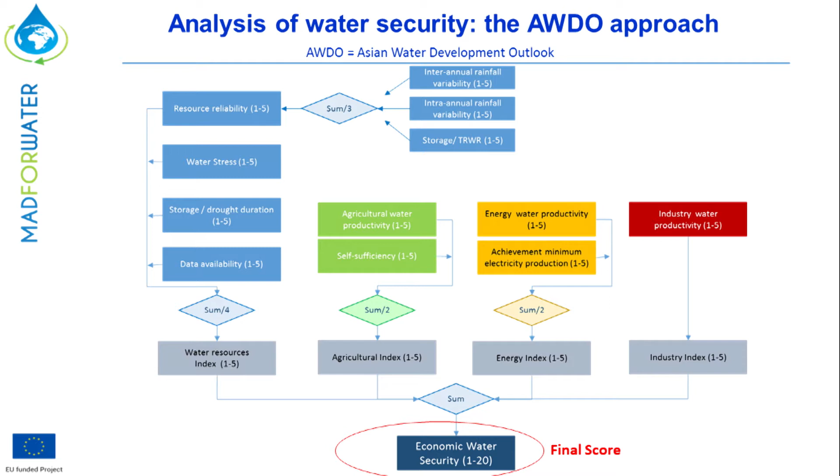We focused in particular on economic water security, which according to this approach is evaluated on a scale from 1 to 20, which is the result of the sum of 4 indices. The first 3 indices are the agriculture index, the energy index, and the industry index, which depend on water productivity and self-sufficiency of each sector.

The last one, the 4th index, is the water resource index, which takes into account several factors, such as rainfall, storage capacity, the level of water stress, drought duration, and the availability of reliable data.

So this approach allows us the identification of the sector in which effort should be directed in order to maximize the overall level of water security in a given country. So this is very important.

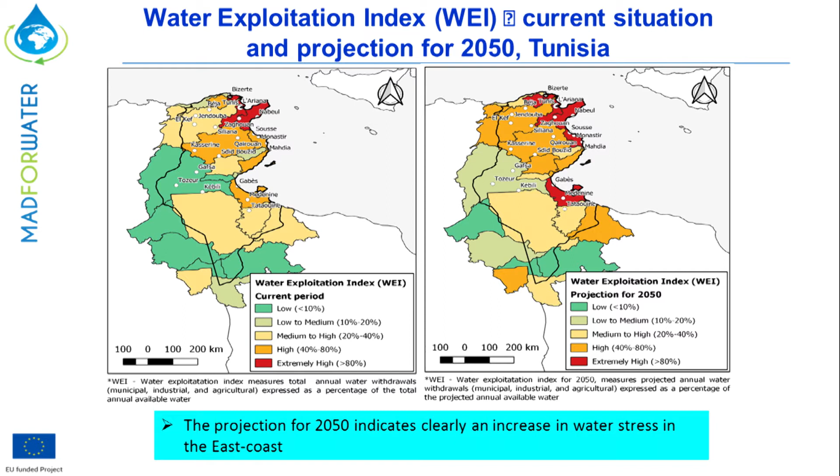So I'll give you the water exploitation index situation in Tunisia, and the study shows that by the projection of 2050, it indicates clearly an increase in water stress in the east coast in the northern part. So this will allow us to see where the wastewater could be reused and have a potential for reuse.

The second phase of the project was to develop what we call the technological phase. We started with the lab scale development of technology of wastewater treatment and efficient wastewater reuse in agriculture in terms of irrigation systems, for Tunisia, Egypt, and Morocco.

So then, after developing at the lab, we tried to scale up and validate the selected technology in the 4 pilots of integrated wastewater treatment and wastewater reuse for irrigation that will be installed in these countries, which are Tunisia, Egypt, and Morocco. So I'll show some of the technology that has been selected for municipal wastewater.

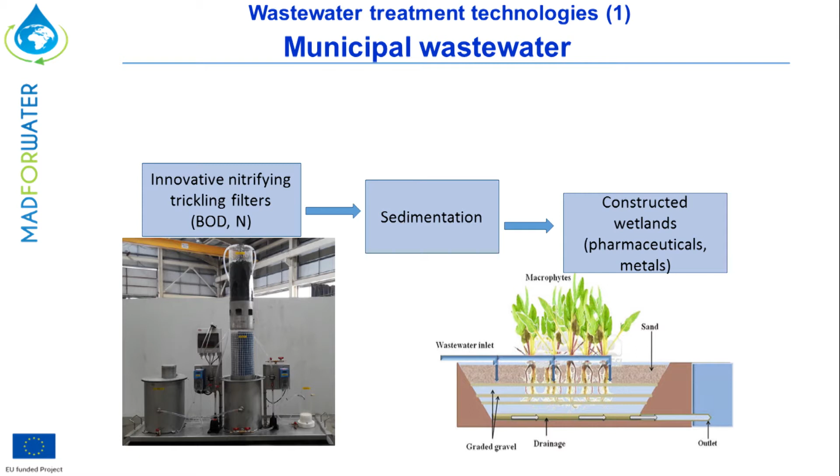This is for Tunisia. We use an innovative nitrifying trickling filter system, followed by sedimentation, then a constructed wetland in order to eliminate some pharmaceuticals and metals that we detected in the raw wastewater.

The second municipal wastewater was in the region of Agadir, where we're using first an anaerobic lagoon to reduce the BOD and nitrogen, followed by sand filtration, then a tertiary treatment using UV in order to eliminate the bacteria to be used for irrigation.

And for textile wastewater, we use a moving bed biological reactor to reduce BOD, nitrogen, and dye, then coagulation sedimentation to reduce the dyes, and adsorption on an innovative resin to eliminate the dye that comes from the textile industry.

And for fruit packaging wastewater, we know that one of the major problems in treating wastewater from fruit packaging is the fungicides that are used for treating the fruits before export. So we started with flotation flocculation to reduce the fungicide and suspended solids, followed by an aerobic moving bed biological reactor, then adsorption on activated carbon to eliminate the fungicide.

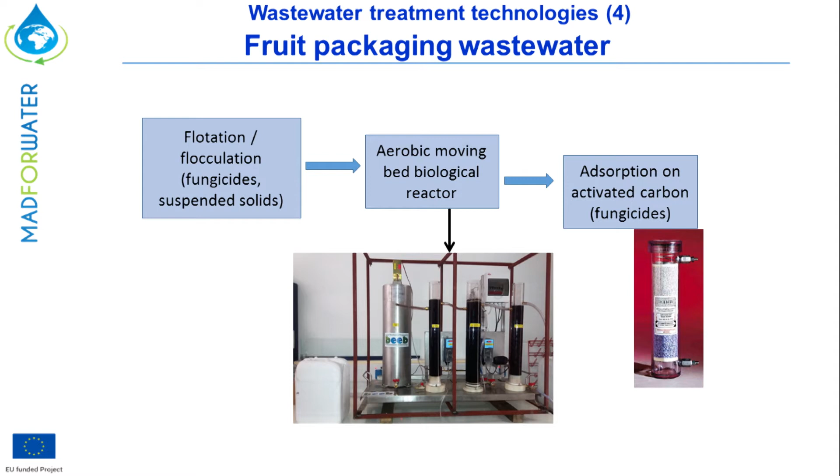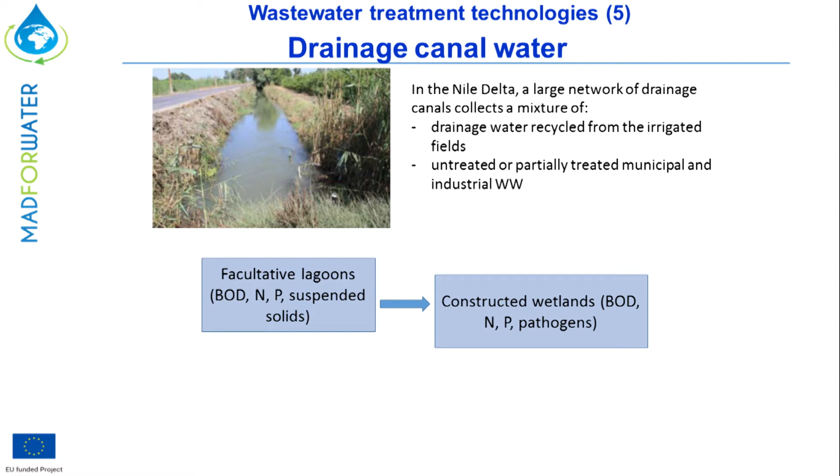In the drainage canal water in Egypt, as you know, most of the large network of drainage canals collect a mixture of drainage water recycled from the irrigation fields and untreated or sometimes partially treated municipal and industrial wastewater mixed together. Here we use facultative lagoons to reduce the BOD, phosphorus, and suspended solids, followed by a constructed wetland to eliminate the BOD, nitrogen, and pathogens.

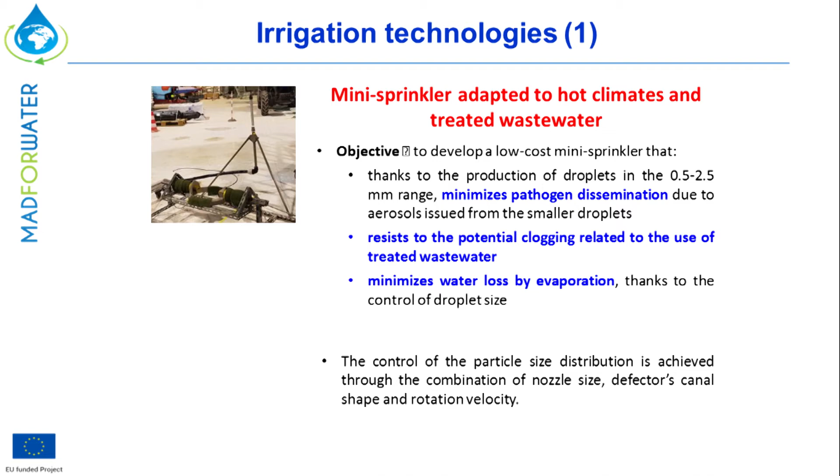In terms of irrigation technology, the project developed mini sprinklers adapted to hot climate and treated wastewater. The objective is to develop low-cost mini sprinklers to minimize pathogen dissemination, and also to resist the potential clogging related to the use of treated wastewater and minimize water loss by evaporation.

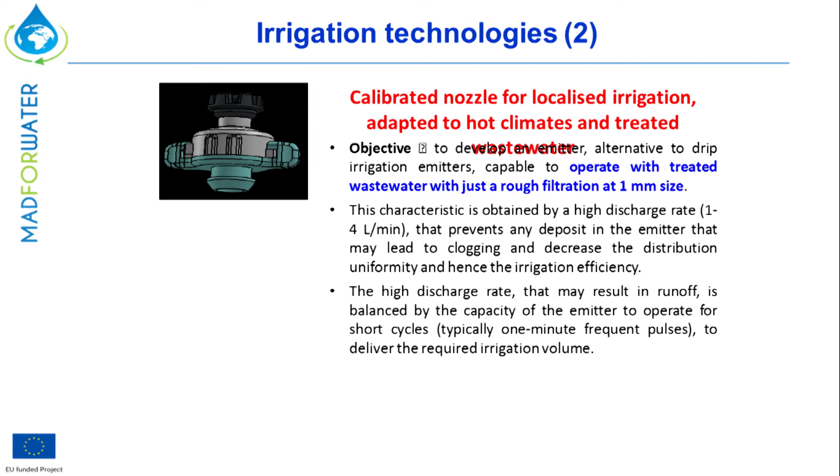Another technology that was developed by Redouane industry in France is the calibrated nozzle for localized irrigation adapted to hot climate and treated wastewater. The objective is to develop an alternative technology to drip irrigation emitters capable of operating with treated wastewater with just a rough filtration of 1 millimeter size. So that means we're trying to prevent clogging using this type of technology.

This is characterized by a high discharge, and I think it's a mistake here. It's between 10 to 40 liters a minute, which prevents any deposit in the emitter that may lead to clogging. But when we use it for irrigation, it's a low operation. We use a short cycle irrigation time to deliver the irrigation volume we want for the plant.

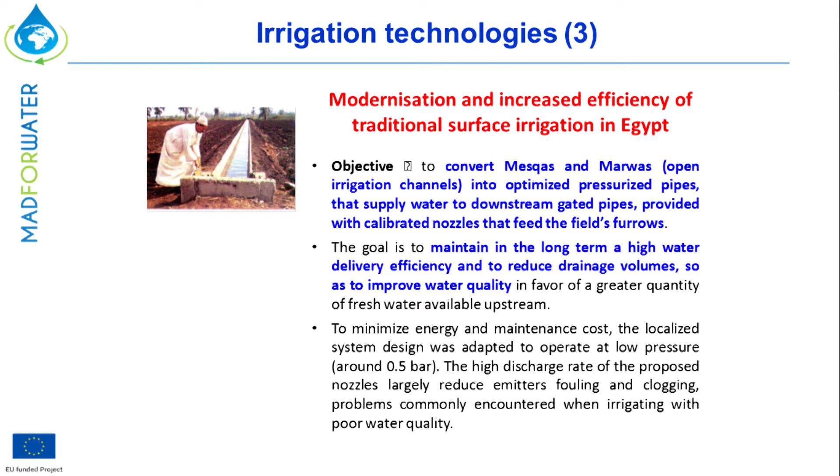Also, for Egypt, we worked on modernization and increased efficiency of traditional surface irrigation. The objective is to convert the open irrigation channels, called here Mesqas and Marwas, into optimized pressurized pipes that supply water to downstream gated pipes provided with calibrated nozzles that feed the field's furrows. The goal is to maintain a long-term and high water delivery efficiency and reduce drainage volume so as to improve water quality.

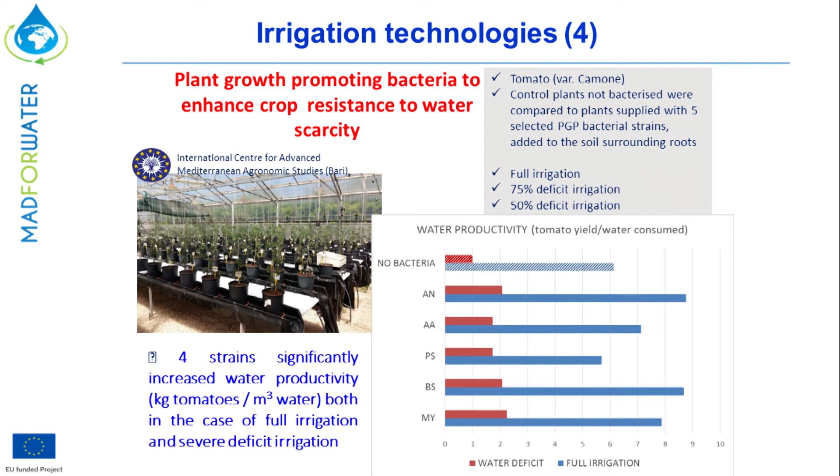Another technology that has been developed, also with the Institute of Bari in Italy, is plant growth promoting bacteria to enhance crop resistance to water scarcity. Here we selected 5 bacteria; 4 of them have allowed us to increase the water stress performance of a crop. In this case it is tomatoes, and we see that these 4 strains significantly increase water productivity, both in the case of full irrigation as well as in severe deficit irrigation. In severe deficit irrigation, we use 50% of the water requirement needed by the crop.

One package of the technology is a model for irrigation scheduling, especially adapted to the use of treated wastewater. Development of a modeling tool capable of identifying the optimal water and nutrient application for crop irrigation in arid climate with treated wastewater, based on the crop, the soil type, and so on, and climate conditions.

So the approach for selecting all this technology that I talked about: technology of treatment, technology of irrigation used for treated wastewater, and so on. All this technology, and this is a very important part of the project, has been selected based on technical performance, life cycle assessment, and cost-benefit analysis, but most importantly, it was based on the feedback from the stakeholders and on social and technical suitability for each basin. Means that we presented all this technology to the local stakeholders in order to choose the technology adapted for each one. So we have to have a score for all this.

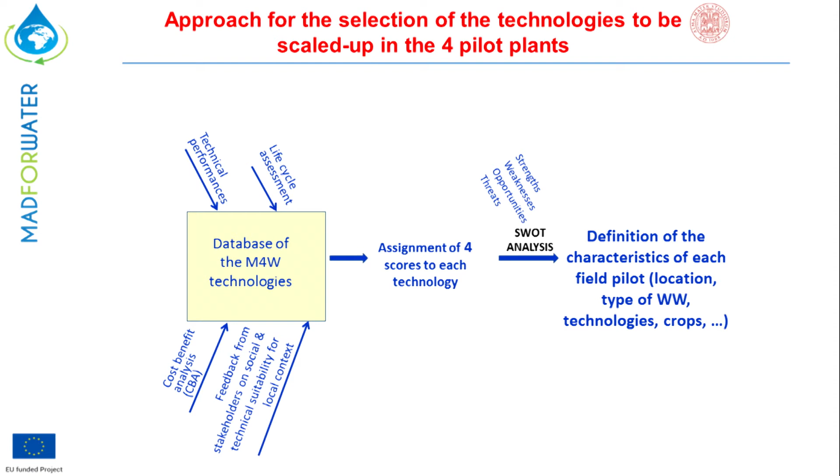We did a SWOT analysis to define the characteristics of each pilot: location, type of wastewater, technology, and crop to be irrigated. So the pilot plant of integrated wastewater treatment and irrigation was based on 2 sets, wastewater treatment technology, but also irrigation technology. So we made an integration for each one. The wastewater treatment selection was based on performance, meaning removal extent, removal rate, effluent concentration, maximum concentration. Irrigation performance will be evaluated on the crop production yield, crop irrigation yield, and plant irrigation and fertilizer requirement.